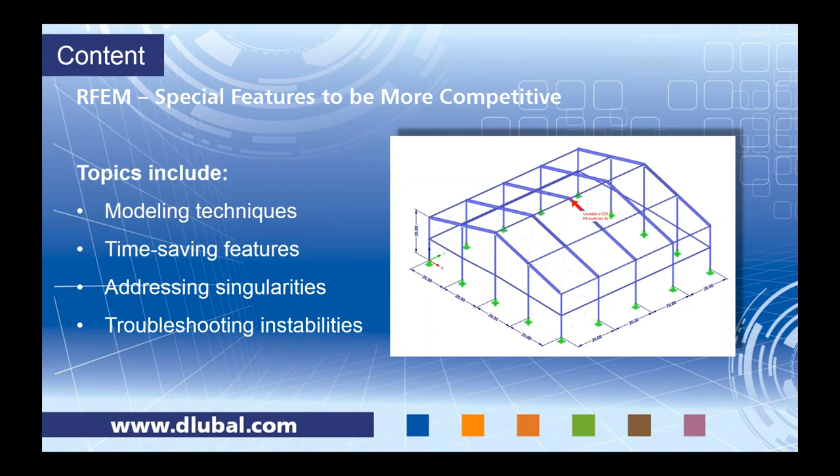I don't think there's a single engineer out there who has modeled that hasn't encountered an instability of some sort. So today I just want to show you some features in RFEM that I think help you troubleshoot these instabilities and to overcome them quickly.

And today's examples, it'll be these 5 examples here. You can see a couple are more focused on the finite element surface elements, and the other 3 are more focused on beam and foundation and structures of this sort. So with that, I don't want to spend too much time on the introduction. We can go ahead and get started with our modeling.

So for our first example today, I just have a simple frame here. If I scroll in, you can see our W shapes for our columns, W shapes for our beams, nothing too elaborate. It's restrained in the out of plane direction.

And I went ahead and applied some line loads here. Dead load, we have 3 kips per foot. Live load, 2 kips per foot. And then I went ahead and put a wind load, a lateral load of 1 kip per foot on the structure. You'll also see here I have some load combinations that were just created according to the ASCE 7 using these 3 load cases. And then I also have my result combination. Result combination is nothing more than an envelope solution to give you the max and mins for all the load combinations that I have specified from the ASCE 7.

So with this result combination, I want to go ahead and run an analysis. And it tells me that the results are not found, so it's going to go ahead and run through all of those load combinations. And if I take a look now, I have a results option down here at the bottom of my Project Navigator tab. So this is where I can actually control what I see graphically from my results. You can see here that right now I have my moments in the local Y direction displayed.

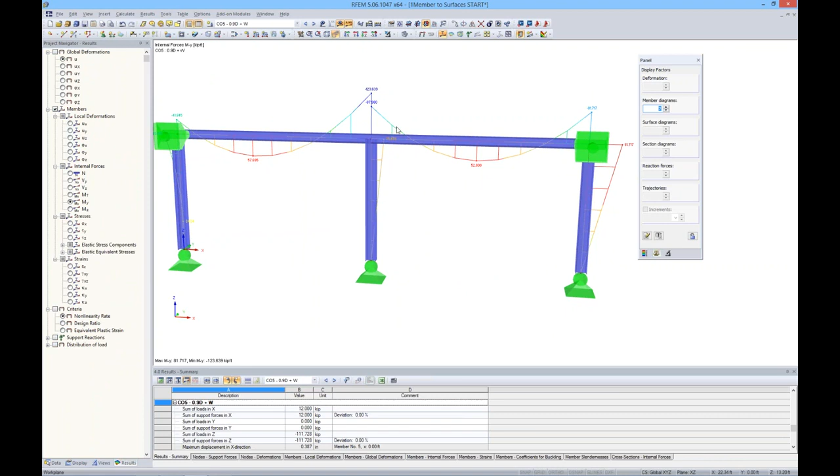We have a max and a min, and I can go ahead and scroll through all of my load combinations here, and it updates according to which load combination was shown. I can go ahead and increase my member diagrams here so you can see them a little more clearly, and we can take a look at our axial forces.

Maybe we want to take a look at shears, we have stresses here. The other thing I also utilize in this model is we have quite a few add-on modules, so we have one called RF Steel Members, which is essentially a stress analysis of our steel members. I'm using the results from our result combination to go ahead and get a stress ratio.

You can see here that if I take a look at my colored panel list, my ratio is actually 1.11 at this intersection. So for design purposes, this obviously is not okay—we can't have over 1.0, and in some cases maybe it's 0.8 or 0.9. You can see the rest of the beam is relatively okay, even at these other column locations at 0.75.

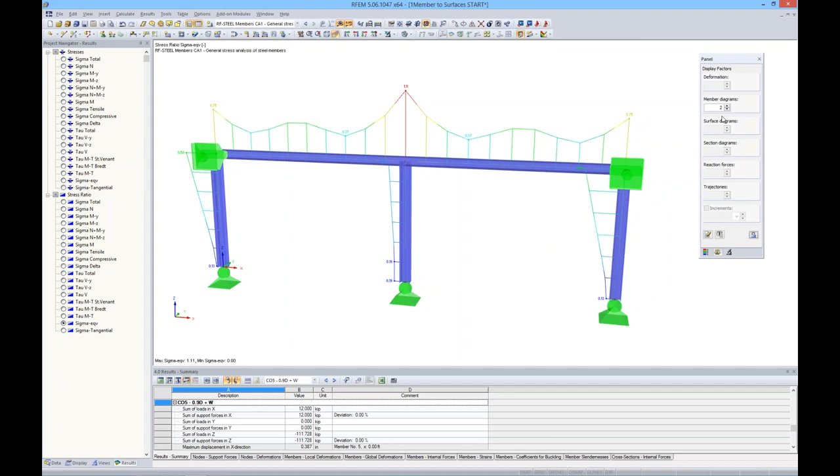If I go ahead and decrease my member diagram, we can really see clearly where the problem area is—it's right at this intersection. So we have a couple options here. We can certainly increase the size of our members, but again this can result in an over-conservative design because the only problem area is really this intersection here.

So what I'm going to propose is that we maybe take a more detailed look at our intersection with a finite element analysis. If I go ahead and go into our wireframe view and turn off my results, we can see that our members are simply 1D elements. When you're drawing a member in the program, it will only be this line, which is the centroid of the section, as a 1D element.

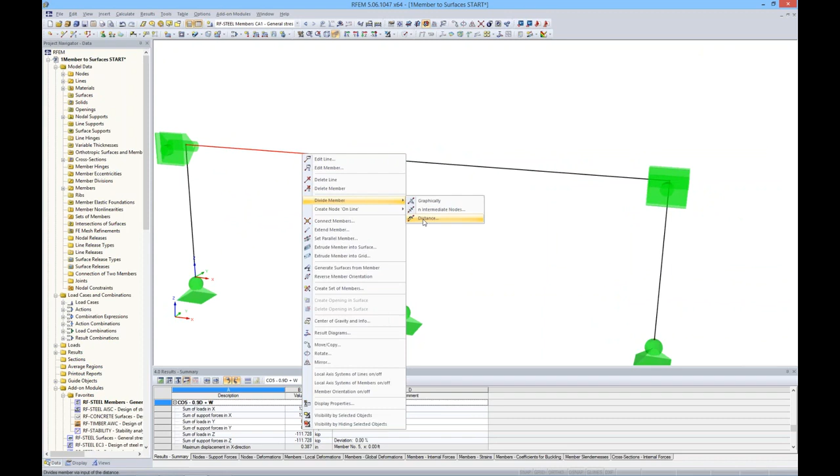I want to go ahead and divide this member here. All I need to do is right-click on the member and go to Divide Member, and I have a few options here, but I want to divide by the distance. You'll notice this arrow here going from left to right, so we know where the start and end of our beam is. So I want to divide the member 2 feet from the end, and I hit OK.

So now you can see that I have 2 separate members. And you might be thinking, okay, what about the loads? What happens with the loads when you divide a member like this? You can see that the loads were also divided, but the program's smart enough to keep that value on the divided member as well.

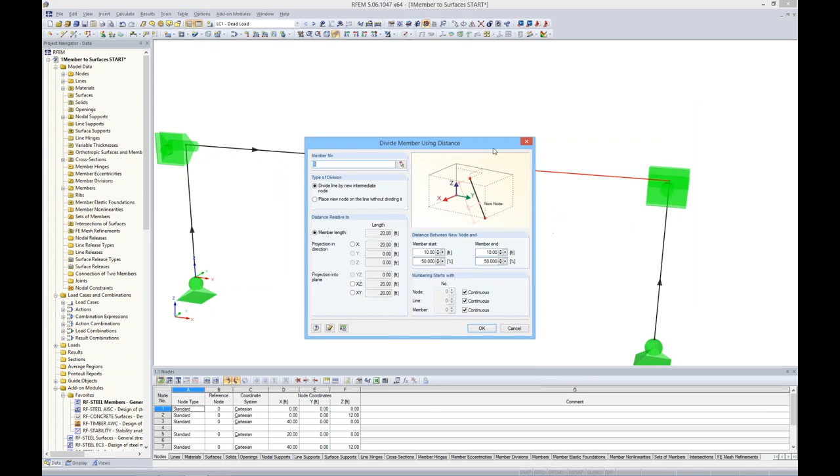So we want to go ahead and do the same thing with this one. I'll divide the member by end distance, and this time, because my arrow is going the other way, from start to end, I want to divide it from the member start by 2 feet. If I select this column and simply hit the Enter key, the last dialog box will come up—that's just a quick tip rather than right-clicking on the member to pull up the dialog box again.

And now we have these 3 separate members right here. So I'm going to go ahead and render it again, and I'm going to select these. The selection is just similar to AutoCAD: if I drag from left to right, it will only grab what's in that box; if I go from right to left, it will grab everything that box touches.

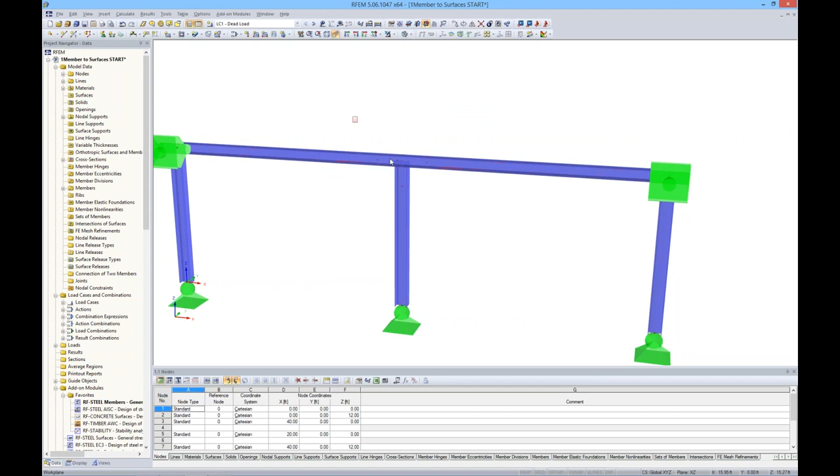So for this case, I'm just going to select here, and I'm going to choose visibility by selected objects. So now I can no longer select anything other than these 3 elements that I specified before. This is a pretty powerful feature that RFEM has that I haven't seen too often.

If I select my 1D members, right-click, and go to my member menu, I can generate surfaces from members. Now you can see—let me go ahead and put it in the wireframe view—that these 1D elements are now surfaces.

So they're 2D elements now. If I go ahead and click on the web for this surface, you'll notice the thickness is 0.38, steel A992. All of this is taken directly from the section you specified, the W shape.

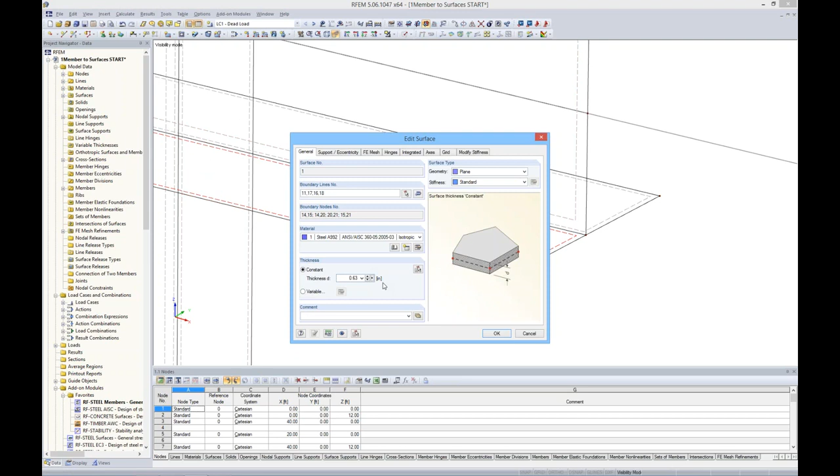If I go ahead and select a flange down here, the thickness is 0.63 inches. So again, everything was taken from that W shape.

You might notice here that we have some geometry issues. Obviously, this is not valid. So we want to move the flanges of the column to the bottom flange of the beam. I'm just going to hold down Control and select all of these nodes at once.

I'm going to use our Move Copy tool, and I don't want any copies here, I'm just going to be moving. Typically I would need to know this distance to move these flanges down to the bottom flange of the beam. Maybe after a little while I could decide, okay, half the depth, take into account the thickness of the flange.

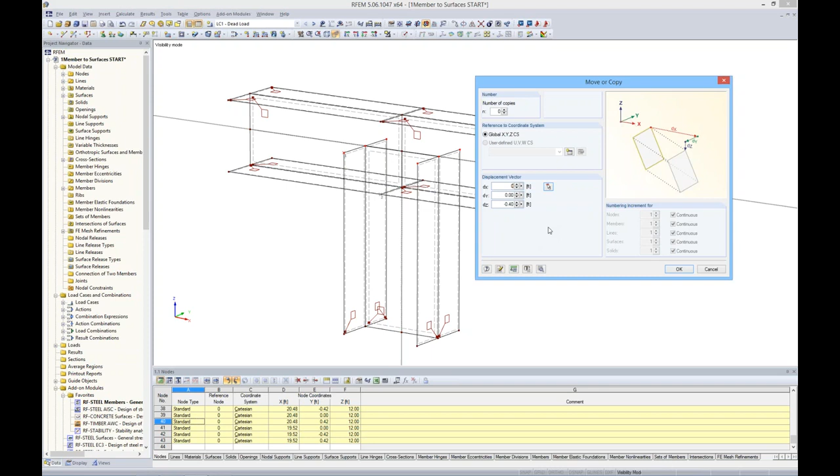But instead, RFEM has this tool where we can select 2 points to get a displacement vector. If I select from the top of the flange down to the bottom of this flange, you can see I now have a displacement vector in dx and dz. We will not be moving it in the dx direction, only in dz. So I hit OK, and you'll notice everything lines up quite nicely.

Now, the other thing to consider is that we have this single point here where this 1D element is framing into the surface. This can cause a singularity. All of these forces are being transferred to this one particular point rather than being distributed over this entire surface. So what I want to do is create a rigid plate at the end.

For our surfaces, if you go up to this button, you'll notice we have quite a few shapes you can choose from: donuts, semicircles, triangles, polygons, really anything you'd like. The program will create this surface element and automatically mesh everything, so there's no need to individually mesh the elements.

Some other programs require you to tie nodes and elements together, but the program will do this all automatically. So for this case, we're going to choose polygon, and for my stiffness I'm going to choose rigid. Everything's grayed out because our stiffness is super high.

So here we will just go ahead and draw our plate, and once we close the loop, we can see we have a new element here. We will do the same for this side, and lastly we want to do the same on the bottom of the column. I right-click to get out of that dialog box.

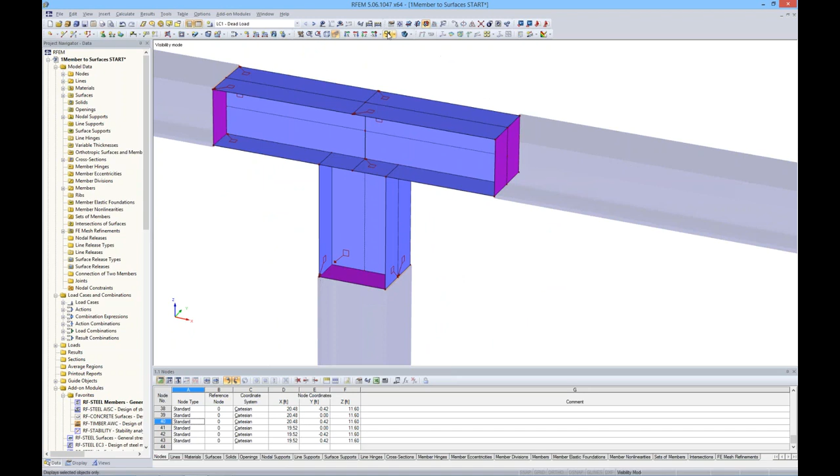You can see now that if I go ahead and render my views and turn off my visibility mode, everything lines up quite nicely.

Surfaces are only modeled at the center line of the thickness, so we have the option in our display menu, which is essentially everything you'll need to adjust your graphical view. If I scroll all the way down, I have the choice for rendering here - the model, the solid model, surfaces - and I can fill including the thickness. Then if I zoom in, you can see everything lines up with the 1D element to the surfaces.

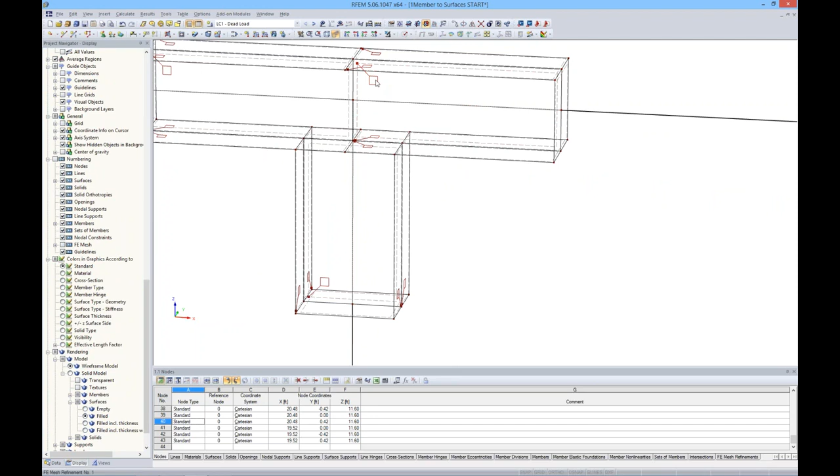I will go ahead and turn that off. Now the other thing I want to show you is the FE Mesh. You can notice that the program has automatically inserted these refinements. For the sake of this purpose, I'm going to go back to our data and go ahead and delete these.

Now if I go to Calculate, FE Mesh settings - and I think most people are familiar with this from FE analysis - you have to specify the length of your finite elements. Default is typically 1 foot. If I go ahead and generate that at 1 foot, we can see this is clearly too large for this situation. We only have one FE element for the entire width of this surface.

So if we go to Calculate, FE Mesh settings, and change this to 0.1, and regenerate the model, we can see that this is much better.

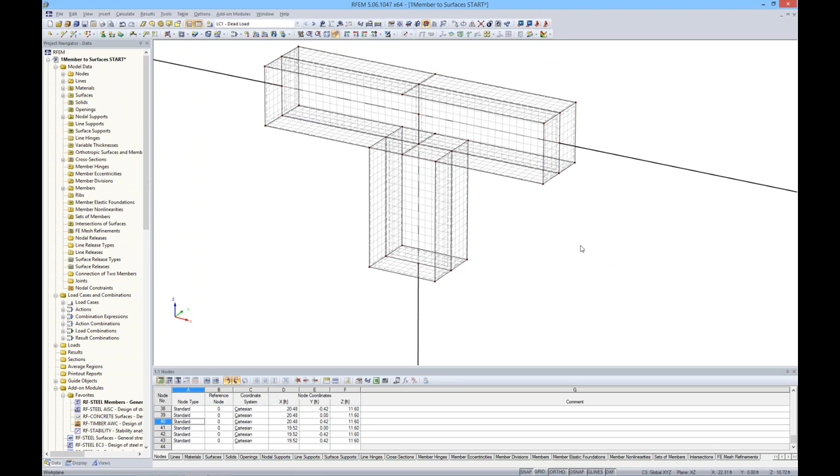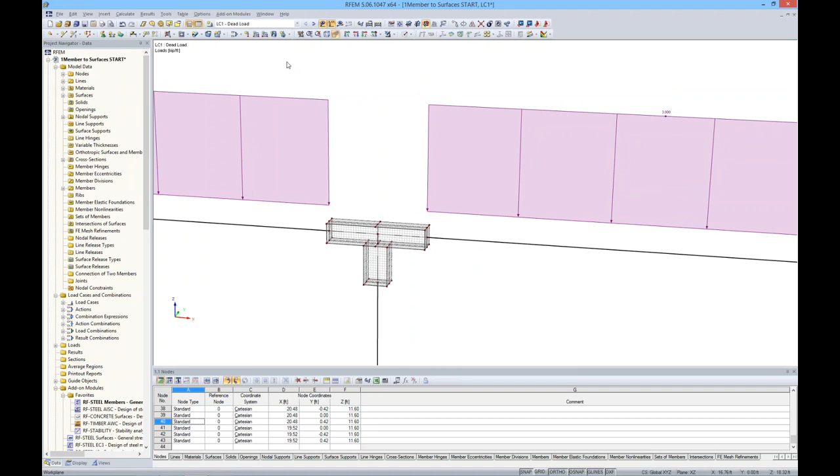The program ties all nodes and lines together, so you don't need to worry about that. Now, one last thing to consider is our loads. For our dead load, we kept these two member loads, but in this case we no longer have a member here, we have a surface. So we need to delete these member loads and apply a line load instead.

Line load is very similar to a member load, except it can be applied to surfaces. So here we want to apply -3 kips per foot. I zoom in and click on my lines, and now you can see the 3 kips per foot has been added.

I want to adjust my live load. If I hold down the delete key and click on each load, that will delete those loads. Again I draw a line element, and because I'm in the live load case up here, that's where this load will be generated. For this one, I want to specify -2 kips per foot.

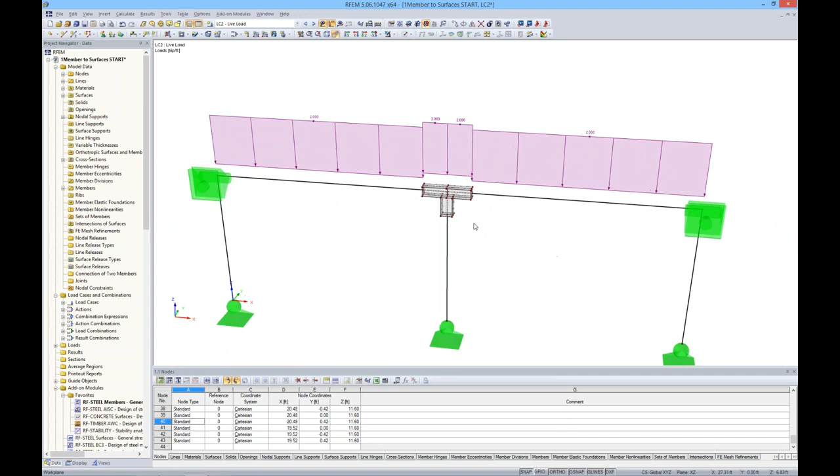I scroll in here, and now we have our loads. Okay, I believe we are ready to run our analysis.

Instead of the members, you'll notice that the member diagram stops short of those surface elements, which is fine. I'm going to turn that off and take a look at our surfaces. If I scroll in here, now I can view all the different internal forces for the member: shears, moments, everything of the sort.

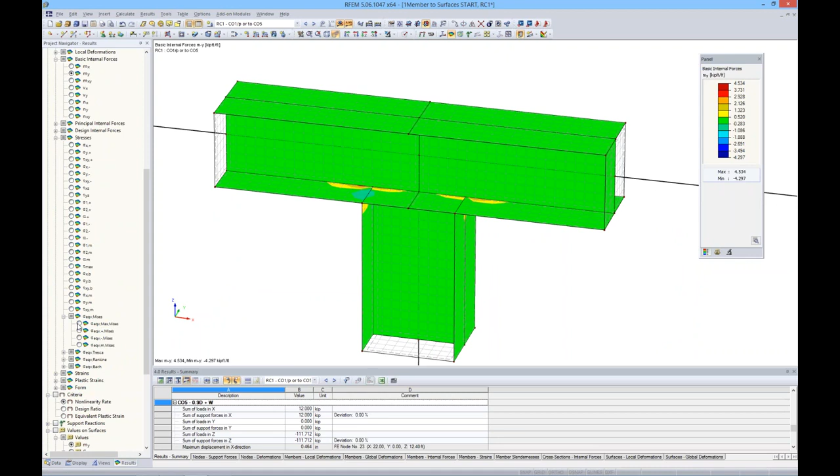What I'm really interested in is the stresses, so I go ahead and view the von Mises stresses. Everything looks okay until I zoom into these points. We can still see that it's extremely overstressed.

So we have an option here where maybe we want to add a plate to this bottom flange, maybe an inch plate.

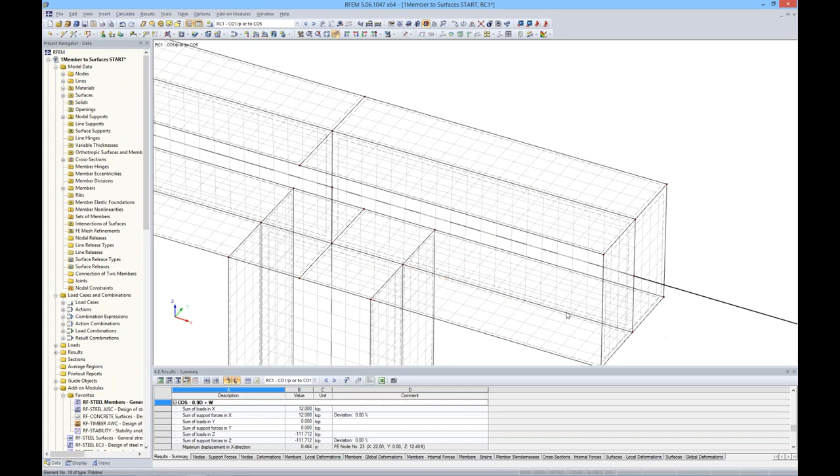If I turn off my results and hold down control, select this surface, then I can select all of these bottom flanges. Now I can right click... oh sorry, I lost it, let me go ahead and do that again.

Okay, now I can right click, edit surface, and increase my thickness now to 1 inch. In the rendered view we won't see that unless we change it to the thickness under our display options. You'll see that it's slightly thicker than our 1D element, which is exactly what we want. I'll go ahead and change it back here.

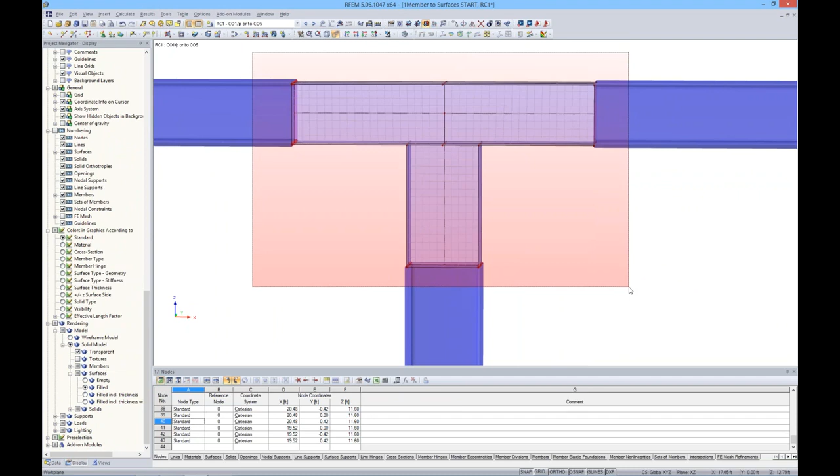Now the other option is to actually do a plastic analysis. With our add-on module, MatNL, which takes into account nonlinear materials, we can select all of these, right-click, edit our surface, and create a new material.

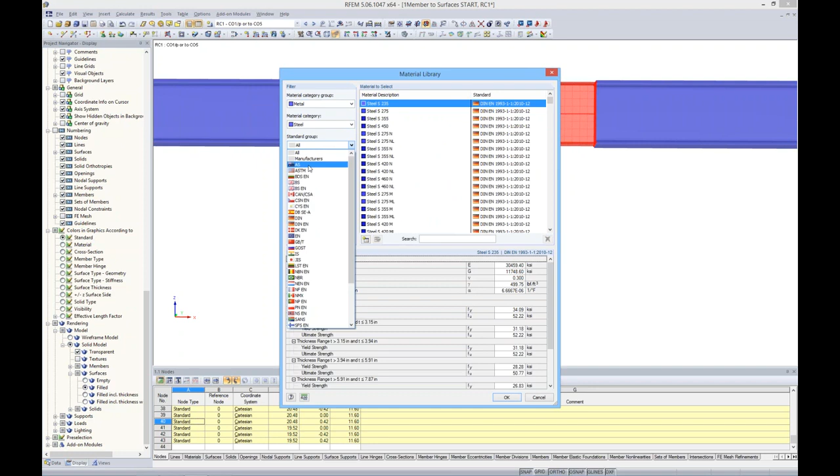I go into my materials dialog box, and you can see the library is full of quite a few materials. We can filter them according to metal, steel, ASTM, but more importantly we have this favorites group option, where you can save the ones you use most often. For me, I created one for USA, and I'll use steel A992.

Now, the material model default is isotropic linear elastic, but for this case I want to use isotropic plastic 2D, 3D. Up pops this other dialog box, showing our stress-strain diagram with our yield stress, 50 KSI, automatically filled out, and our strain hardening modulus. I click OK, everything looks fine, I hit OK, and OK once more.

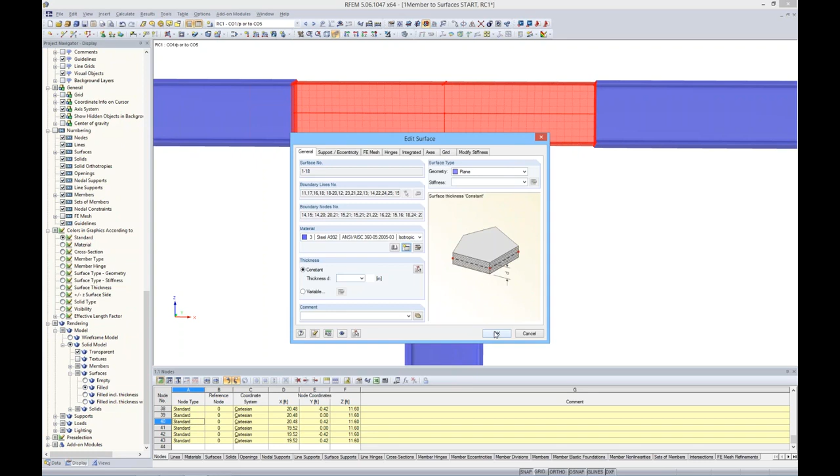If you're not sure whether the material is different from the rest, you'll notice I'm in my table down here with steel A992, which is isotropic linear elastic. As I highlight the field in the table, the members themselves will highlight as well. This blue one just means it's not currently being used. The steel A992 plastic 2D and 3D were actually applied here.

Okay, so I want to run my result combination again. This will take slightly longer than the last one because now it's a nonlinear material. Keep in mind the size of your mesh also matters for your finite element analysis—at some point, a smaller mesh won't change your results. So I'd suggest keeping a mesh that doesn't create a super long solve time but still gives you accurate results.

You'll notice that if you decrease the mesh size and solve again, your results won't change by much. We also have this graph here showing the maximum displacement as the program cycles through each iteration. As soon as this is done solving, which will be just a second longer... again, it's just because we have a nonlinear material.

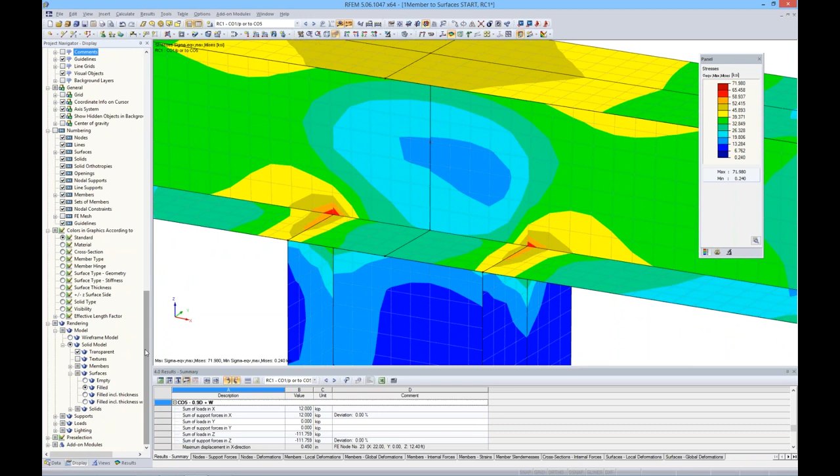Under my display tool, scrolling up to results, I want to choose constant on elements. This will average out the 4 values for each FE element, so you can take a look individually at each one. You'll notice that nothing exceeds 50 KSI, which is our yield stress—exactly what we'd expect.

An important thing to show you here is that we have an option under results called criteria. This criteria will show us the FE elements that are in their full plastic state at 1.0. These other two green ones are somewhere in between 0 and 1 as the ratio, and the other elements have not reached that state yet.

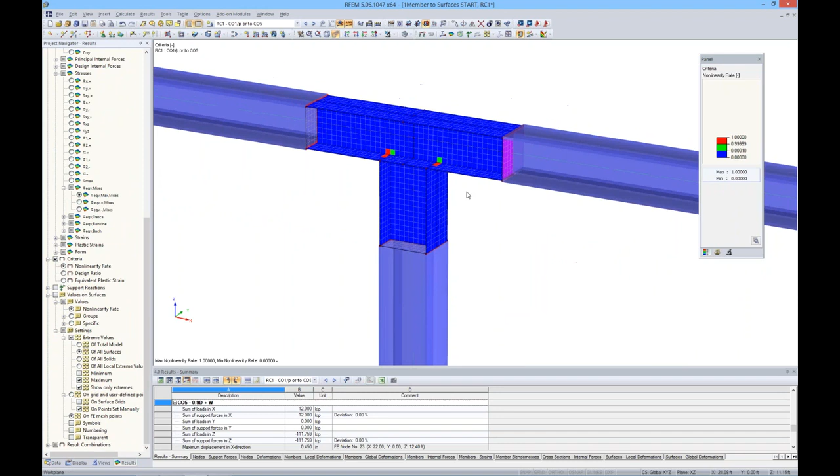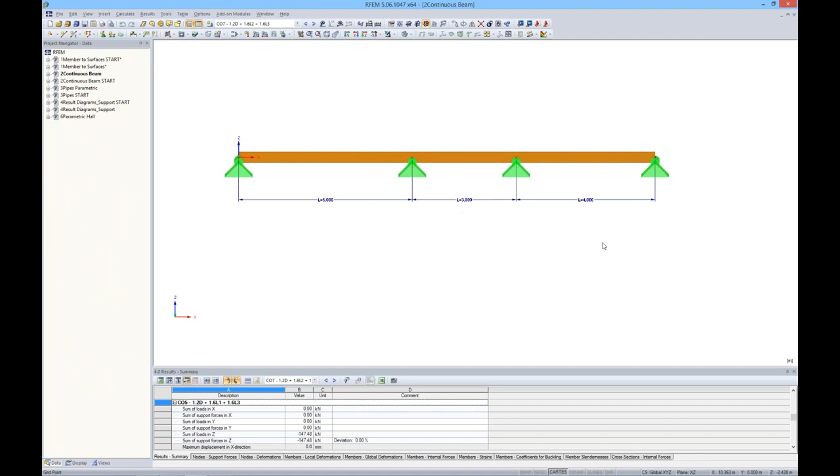So that concludes our first example. I want to move on to our next one, which is also very simple—it's just a continuous timber beam with 3 spans, nothing too special about it. But what's going on behind the scenes is actually quite powerful.

The purpose of this example is to show you the use of parameters, or parametric modeling. If I go to edit parameters and move this dialog box down, you can define a variable in the program and use it in an equation to change span lengths, loads, or angles. There are quite a few options—we can change areas, angles, surface thicknesses. I'll get into that in a minute.

If I type in 2 meters here, and for my B length—my second span—I'll type in 5, and for my C length, I'll type in 3, then hit apply, you'll notice everything updates. Supports are moved, and if I look at my dead load, everything was adjusted along with it. We also have separate live loads on each span, and those were all updated as well.

Now let's say I want to edit my live load to -2 kilonewtons per meter. I hit apply, and you'll notice the live load was updated. So you can understand the benefit of using parametric modeling for a company that creates a lot of similar structures, where geometry or loads change slightly—parametric modeling helps you deal with similar structures to improve your efficiency.

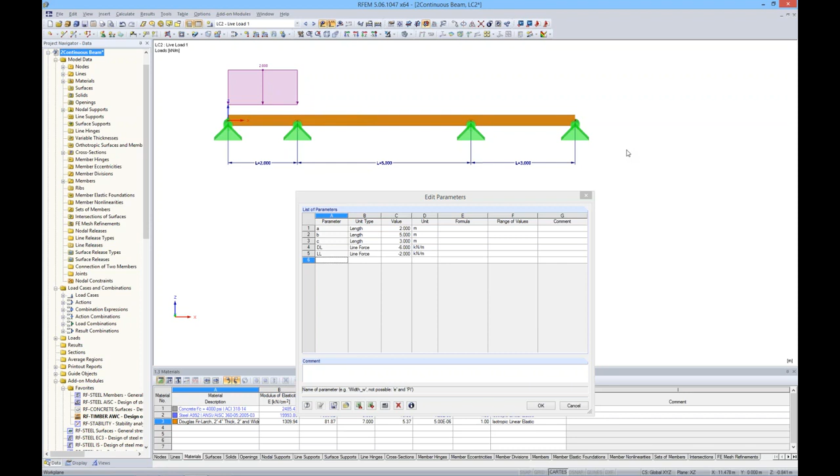Now the other thing I wanted to show you is I created quite a few load combinations from the ASCE7. If I take a look at my result combination, it's asking me do I want to go ahead and run the calculation. Yes, so this is just finding the max and mins of all those load combinations.

Now I want to take a look at my support reactions. You'll notice as I scroll through them my support reactions are changing according to the different loads that I have. Now I want to show you our print report option and including these parameters. I think RFEM has quite the powerful print report options compared to a lot of other software I've even used in my design career.

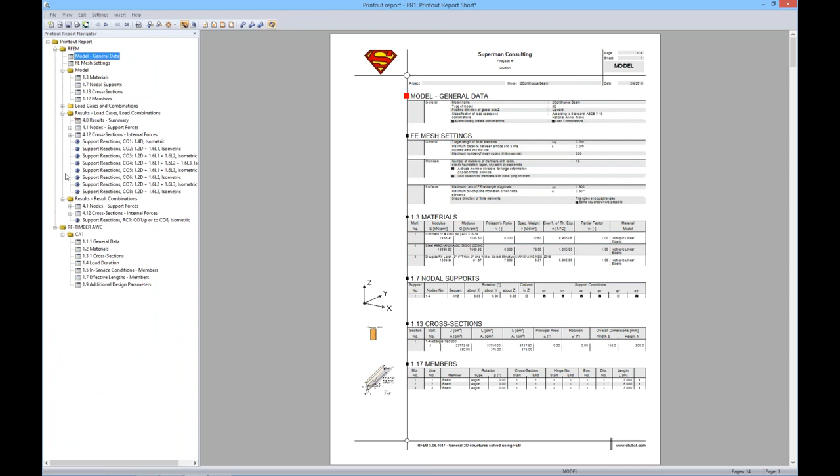If I go ahead and open up a printout report, one I created previously shown here, a separate dialog box will open. You'll notice on the left are our table of contents, or report navigator. I can click on these and our report will update according to where I am. The same goes here - I can keep scrolling down and the table of contents will also update.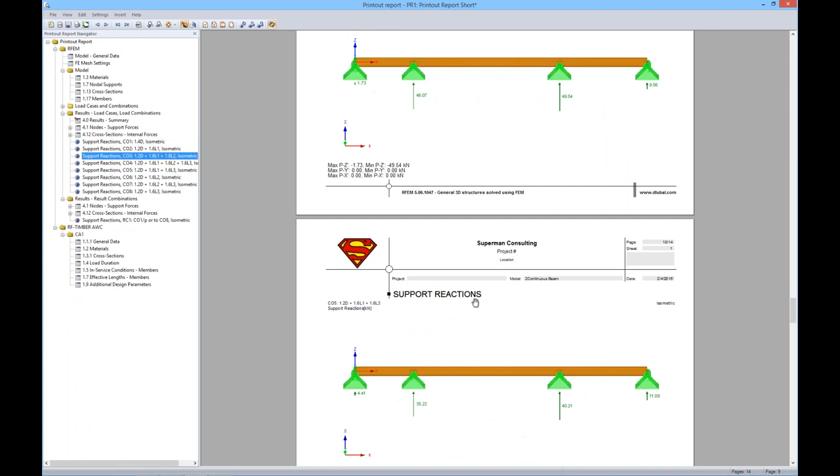I went ahead and put in some pictures of our support reactions, and you can see this is reflecting our spans that we currently have, which is 2, 5, and 3, I believe, for each load combination. If I zoom in here, I can see load combination 3, my support reactions, my max, my min. Everything has nice headings, very clear. But let's say my beam just changed all of a sudden.

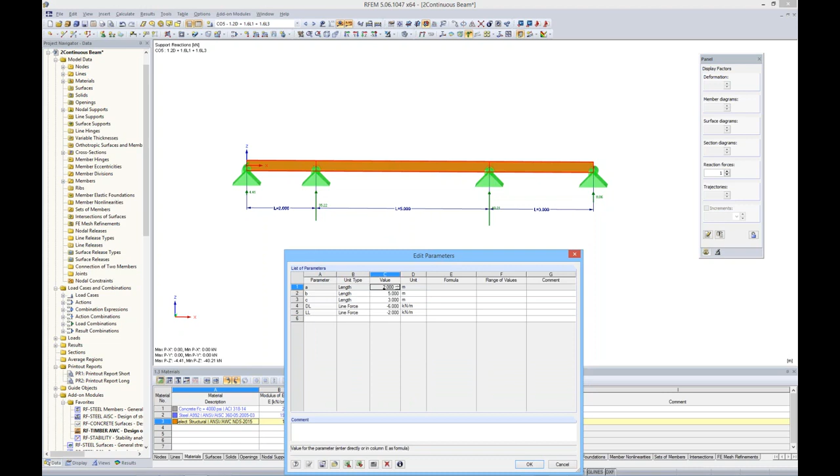So I'm going to exit out of this print report - no, I don't want to save it. I'm going to open up my parameters, which down here in my table under my first model data tab is a quick link to my parameters. Let's say I want to do 5 meters, 2 meters, and 3 meters. I hit OK, and you can see that everything was updated. Now I want to go ahead and run the results again.

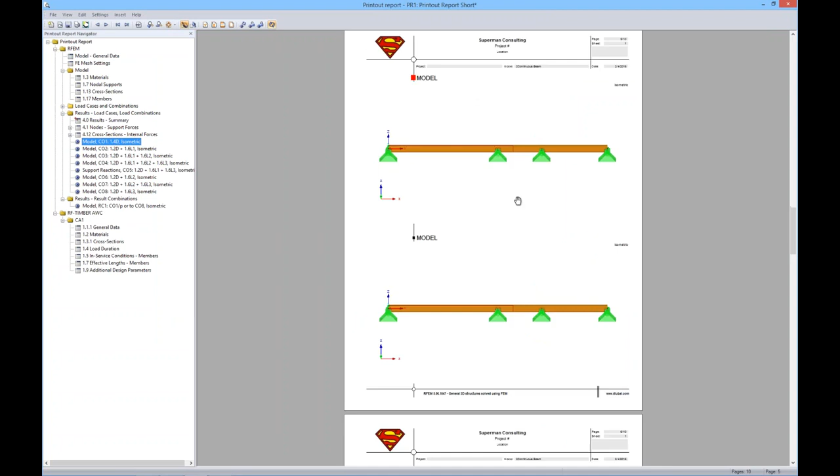And I go back to my print report, and now I want to jump down to these pictures, and you can see it looks like we are missing our support reactions. Well, regardless, I think we can see from our results here that we have the support reactions shown, and it looks like they're shown here. It should go ahead and update in our printout report. I'm not quite sure why, but regardless, the geometry is taken into account.

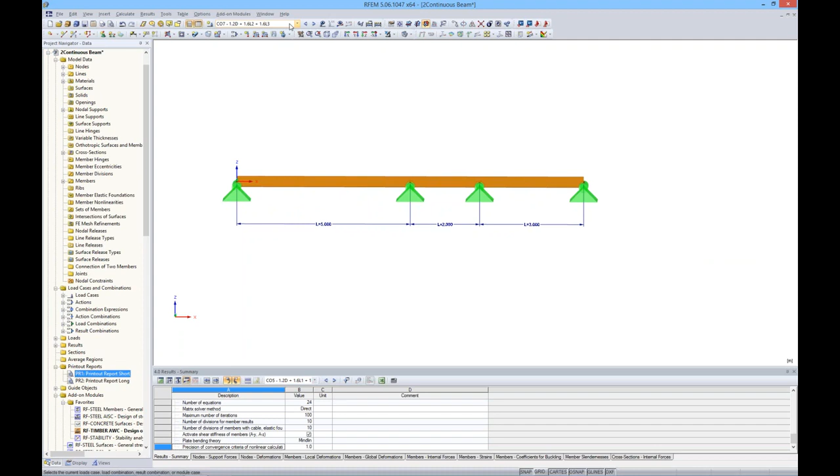Everything in the print report will be adjusted according to the changes you just made. I can showcase this further with the printout report by looking at our members. I'm going to turn off my support reactions and just view my moment about the y-axis. As I scroll through - oh, that was probably the issue, I didn't run a result combination. Again, this is just an envelope solution of all the load combinations, and I think that's why the print report didn't show up, because I didn't run all of them.

I can go ahead and scroll through each load combination for the moment about the local y-axis. I'll increase these. Let's say I wanted to print off this moment for each load combination. Typically you would have to take a picture or a graphic, insert it into your PDF print report, go back, change the load combination, and do the same thing. But we have an option in here called mass print.

If I go to my print option, graphic printout, I see the mass print here. I can hit these settings, and I have 3 tabs that pop up: model, loads, and results. I'm currently in results, and the program knows I'm looking at the moment about the y-axis. But for my load cases and combinations, instead of the current one I'm in, I'm going to select all. I hit OK, and now the program's cycling through each load combination for my moment about the y-axis, and it's going to insert those into this print report automatically.

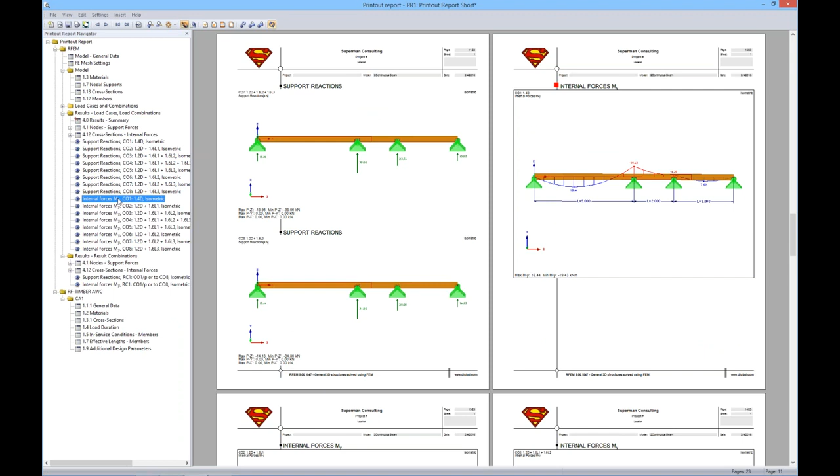So you can see now that my support reactions were updated - I just needed to run my result combination. If I scroll in here, I can see I have load combination 1 with my moments, showing my max and my mins. Scroll down, load combination 2, load combination 3 - everything is done automatically. I think you can imagine how much of a time saving that is when you can use this mass print option.

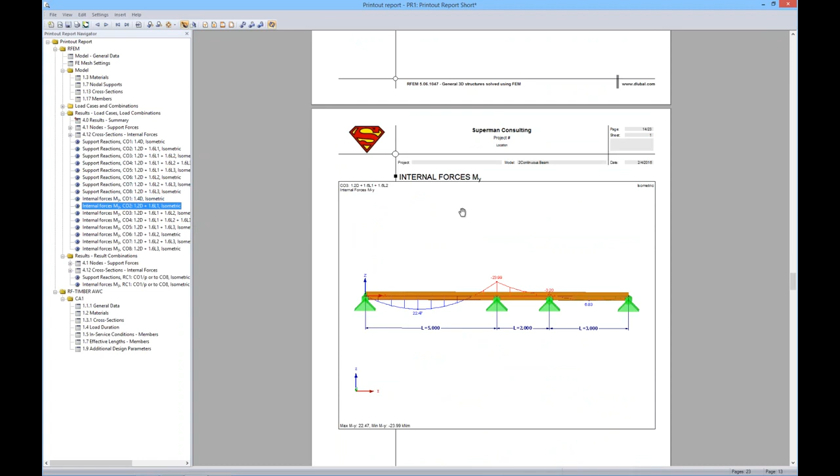Okay, so the question is, with parametric modeling, how do we actually incorporate these parameters into a model? So for the sake of time, I have already created this simple beam, and I've applied some loads on it according to dead load and live load.

I want to go ahead and edit my parameters. If I type in A for my first span length, the length automatically pops up, and we'll do 3 meters. B for my second span length, we'll do 5 meters, and C for my third. Now notice nothing in the model is changing right now - I'm just defining what parameters I want to have in the model. We'll make this one 4.

Now let's say we also want to consider dead load. Instead of length here, I want to go down - this is where there's quite a list to choose from for the amount of parameters you can define: precambers, moments, stresses, time, mass, percent. So we have quite a powerful option here when it comes to parameters.

For this case, I'm just going to go for a line force, and I will do -4 kilonewtons per meter, and maybe my live load, again a line force, and I want to do -2. Okay, so now that we have our parameters defined, we need to actually apply them to this model.

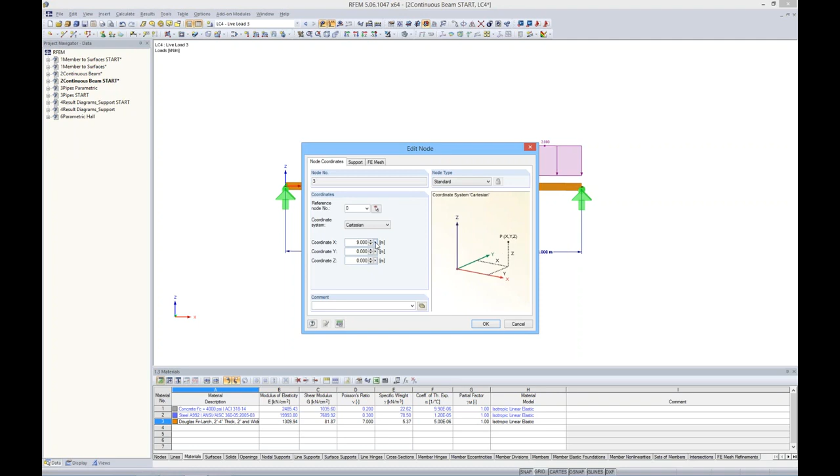I go ahead and do the same thing to this node. It's set at a static 9. I want to edit my formula, and I'll do A plus B. And now, again, it's dependent on those parameters.

And lastly, I want to do this one, and I will edit my formula: A plus B plus C. Okay, so everything is now dependent on my A plus B plus C.

Now we also need to do the same thing for our loads, and we can highlight all of these, right click, edit member load, and do the same way that we defined those node coordinates. Instead, here for the load parameters, for the actual value, I can use this arrow, edit formulas, and choose my dead load.

I hit OK, and now that dead load is dependent on that parameter. Now we just need to do the same for each live load. So instead of dead load, I'll choose live load here, hit OK, and do the same for each span - edit my formula, add my live load, hit OK, and lastly I have this one.

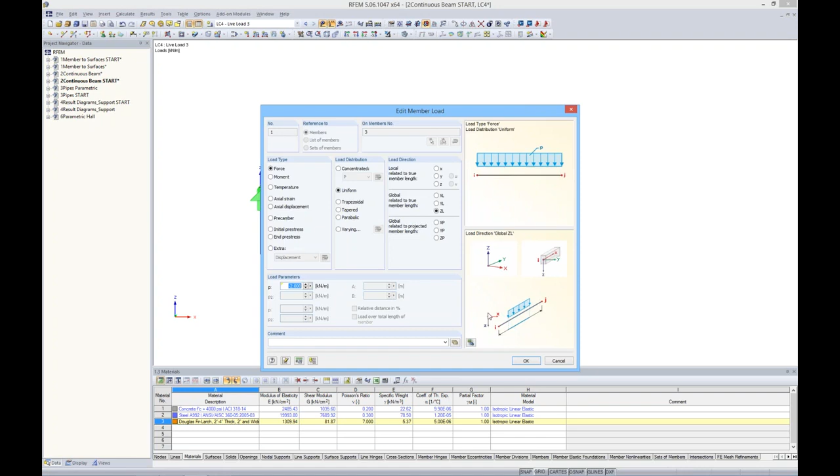Okay, so now if I go ahead and move this up and I open up my parameters, I change this to 2 meters, 3 meters, 6 meters.

We should see that everything is updated just fine. For our live load, we'll go ahead and choose -6 and apply that, and everything is updated. You can see that this is obviously quite valuable for a lot of the similar structures that you're working on, or maybe it's the same structure and there's a lot of changes going on within the design process.

So that sums up that simple model. We'll go ahead and move on to the third one. This one is a little bit more complicated, an FE analysis with our surface elements.

I also created this model to have parameters in it as well. I've defined my parameters, my angles, my loads within my pipes, which you can go ahead and define a pressure load within this pipe, and maybe the spacing between. If I go ahead and change this to 30 degrees and hit apply, you'll notice that this pipe automatically changed to 30 degrees here.

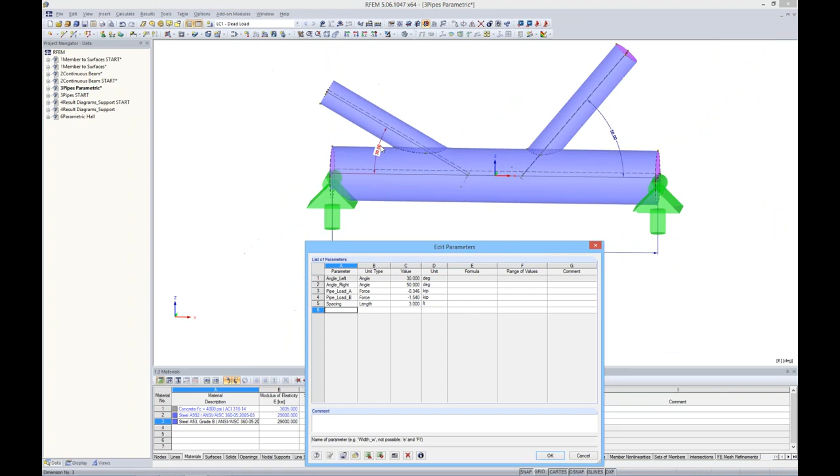One thing to take note is that this is an intersection of surfaces. You'll notice that when I changed this to 30 degrees, everything was updated. There's no need for me to change my FE elements. I don't need to go back and change the geometry. The program's smart enough to make all of those changes as I go ahead and adjust the model.

I can show you guys again, if you take note at this 50, I can go ahead and change my angle right to, let's say, 70 degrees. I'll go ahead and hit apply. Again, everything is updated automatically.

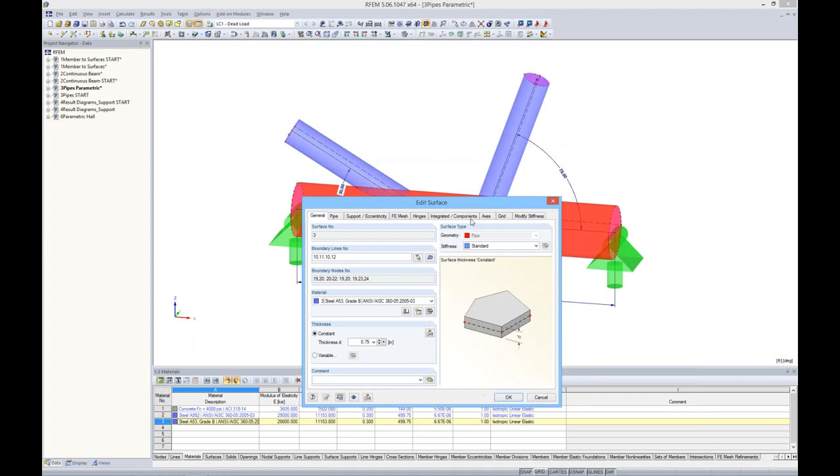I even have the ability to click here and right click to edit the component's parent surface, and we have a pipe option here. I can change my radius to 2 feet. Again, everything is automatically updated. Those surface intersections are moved up and everything looks quite nice.

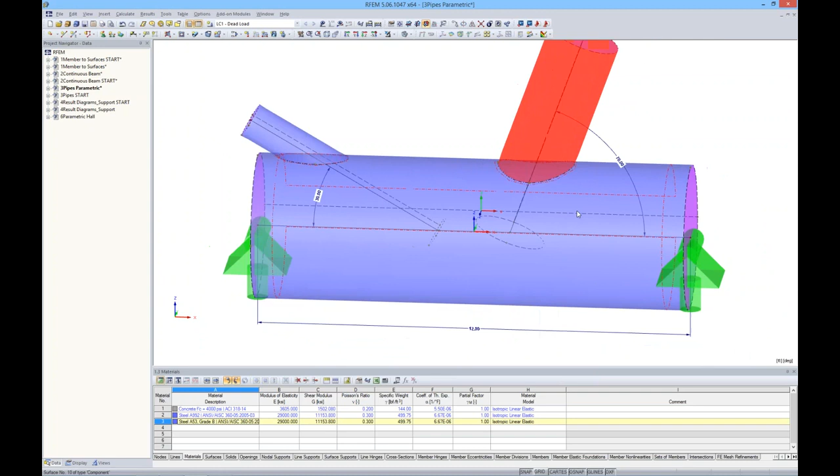We can do the same here. Maybe make this radius a foot, hit OK, and again, everything looks okay.

So I want to show you guys how to go ahead and create this model and create an intersection of surfaces. I'm going to go ahead and open up this beginning model, and all of these are just line elements. They're not members, they're just simply lines in the program. I can define maybe members out of them if I wanted to, but in our case I'm going to go ahead and apply a pipe surface.

So I'm using these quick tools up here, and you'll see there's an option for pipe. Maybe my material when I first open it up is something like concrete, or maybe it's even timber, just something not applicable.

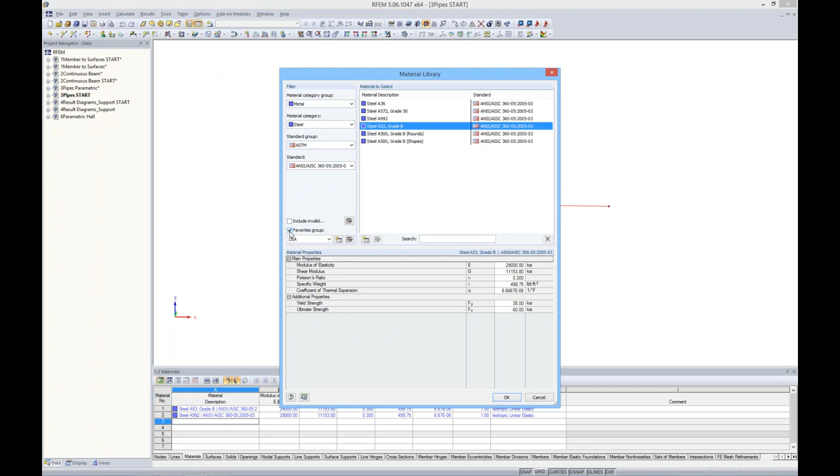So I can go in here to import a new material from my library. Again, for even metal, steel, ASTM, we have tons and tons of materials. I want to utilize my favorites group again, and I'll just go ahead and choose my steel A53 grade B. My thickness for my pipe, we'll just go ahead and set that to 0.6 inches.

Now we need to go ahead and click on the pipe tab up here and choose our radius, which we'll just do 1 foot. Now you'll see that the program automatically applied it to this line because I had it selected when I went into that dialog box. I want to go ahead and do the same for these two elements.

So I can go in here to my pipe surfaces again, and again you can hit the enter key and it will bring up that same dialog box, which is a little bit time saving. For my thickness here, I just want 0.2 inches, and my radius I'll go ahead and set it at 0.5 feet or 6 inches for these smaller strut pipes. Then all I need to do is just click on those lines and everything's created.

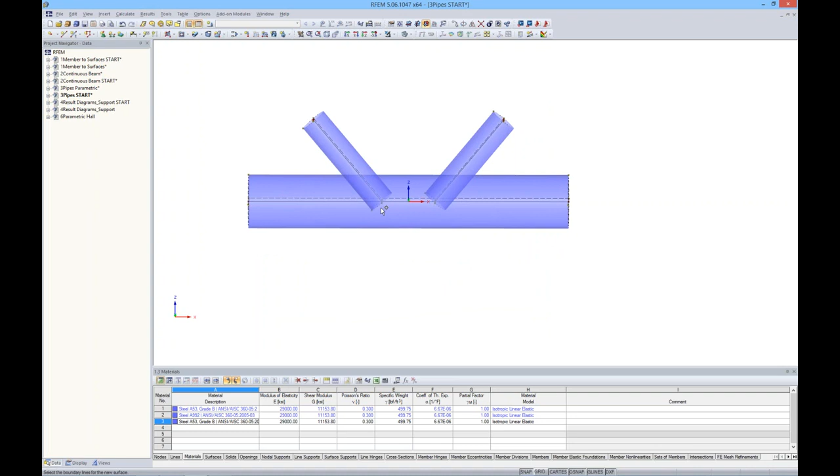Now you'll probably see that we have some issues with our geometry. Same thing as the first one, we have some intersections here that we need to take care of. So what I actually want to do is select everything, right click, and for my surface I want to go ahead and create an intersection. The program will automatically intersect all of these surfaces that I have selected. Now they're all just surface elements, but again we need to take care of this geometry.

So I'm back in my data navigator for this model, and I can actually go to my surfaces here. If I expand my surfaces and click on them, you can see as I scroll down the list that it's actually highlighting each element that I'm clicking on in the graphic view. So we get to this component right here, and we do not want to consider this in our analysis. Typically this would not be a realistic situation. So we can right click here, and we can actually deactivate the component.

So you'll notice here that it says inactive, and it's gone from our solution. I can go ahead and do the same thing for this one, deactivate, and I also have the ability to activate it again. But for right now, this is exactly what we want.

Now, just like the first model, we need to go ahead and create some rigid end plates here. Instead of polylines, I'm going to select a boundary line, and select rigid here. All I need to do now is simply select these circles. You can see how easy it is to apply surfaces in RFEM—just the click of a button. I can right click to exit out of that.

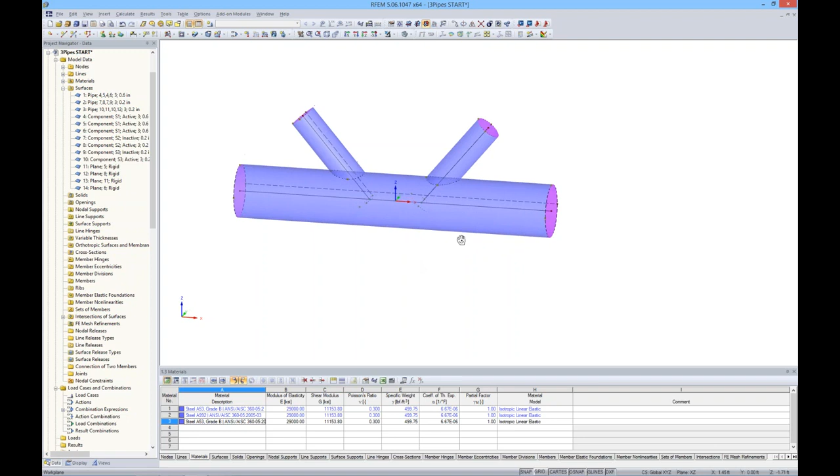Now the next thing I need to do is apply some support. I'm going to click on New Nodal Support, and since I don't know what this is, I'll create a new one. You'll notice here that we have a lot of nonlinearities available—maybe sliding, maybe friction, you can define your own diagram. So quite a few options here, or we just have the typical linear nodal supports.

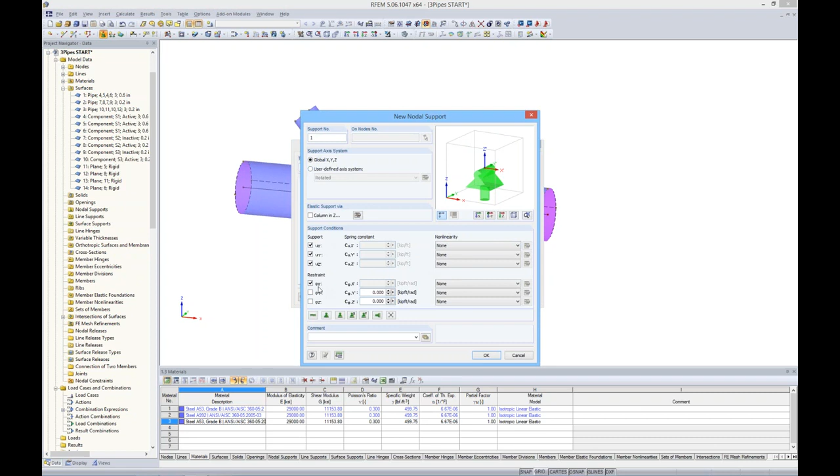For my case, I'm just going to restrain it in the X direction and in rotation about the X, and then in the X, Y, and Z direction. I'll hit OK, OK, and all I need to do is click on these nodes.

So lastly, I want to create a simple load case. Let's just do self-weight, so I'll call this load case description dead load, and activate self-weight. Now we just have this single load case, and we can view our results by running the combination. Actually, I forgot one thing I wanted to mention.

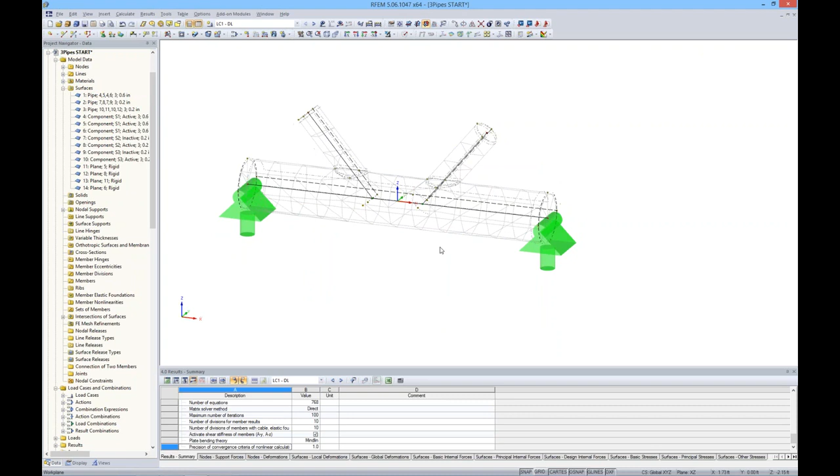Let me clear these results. You can see our FE mesh is not ideal—it's too big, and as you decrease this your results are going to change. When I go to calculate FE mesh settings, the default is 1.0, so for larger structures this may be completely adequate. But for a smaller model like this, let's change this to 0.25 and regenerate our model. And that looks quite a bit better.

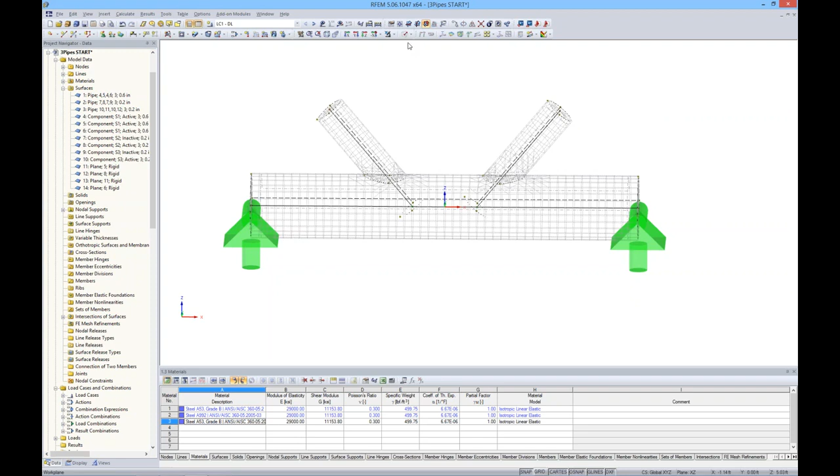You also have the ability to add an FE mesh refinement, let's say around this area, around a line. What that will do is decrease your mesh size only around this area without decreasing the entire model, which can significantly save on solve times. So let me run that analysis again now that we have a better mesh. We're only running dead load, so it should just take a second.

Now we can see that we are viewing our von Mises stresses for the pipe. Again, similar to the first example, maybe we have some higher stresses here that we want to address. We can certainly view our deflections, which is actually only 0.001 because it's only self-weight. I'm not going to do the parametric modeling because we went over that in the last example, but you can see how powerful surface elements are in RFEM and how easy it is to apply them.

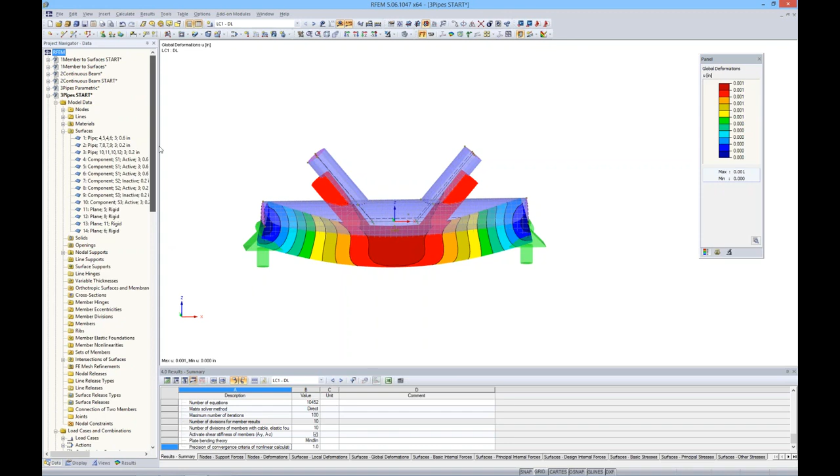Okay, so moving on to our next example, this is just a typical foundation—a concrete foundation. If I double click on it, I've defined it as 4,000 PSI concrete, 12 inches thick, maybe a foundation or an elevated slab, something of the sort.

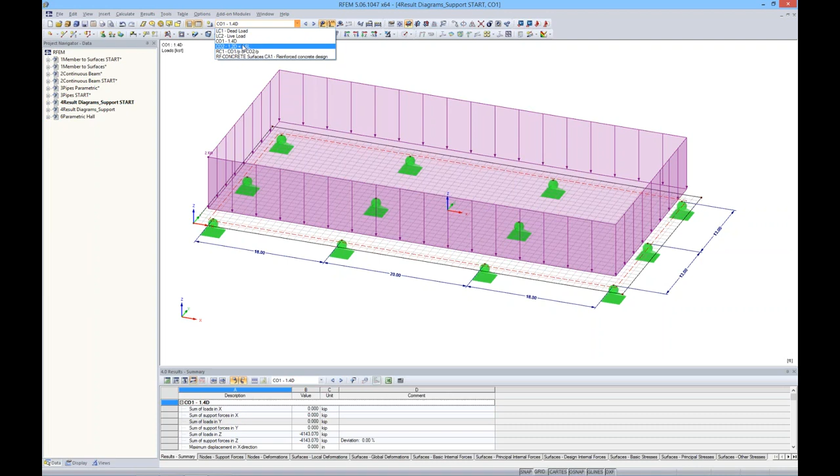I've also applied a few loads here—just your typical dead load in KSF of 1.5, maybe a live load of 0.75. I also have a couple load combinations here according to ASCE 7, and the result combination for the envelope solution.

Now I've also utilized our add-on module RF Concrete Surfaces. What this will do is tell you your reinforcement that's required according to whichever load combinations you choose. I ran RF Concrete Surfaces according to my result combination because I want the max internal forces to be used for the design of my reinforcement.

So I can go ahead and solve here—I already had them saved. If I look at my ISO bands, I can see here from my RF Concrete Surfaces, I'm looking at my required reinforcement.

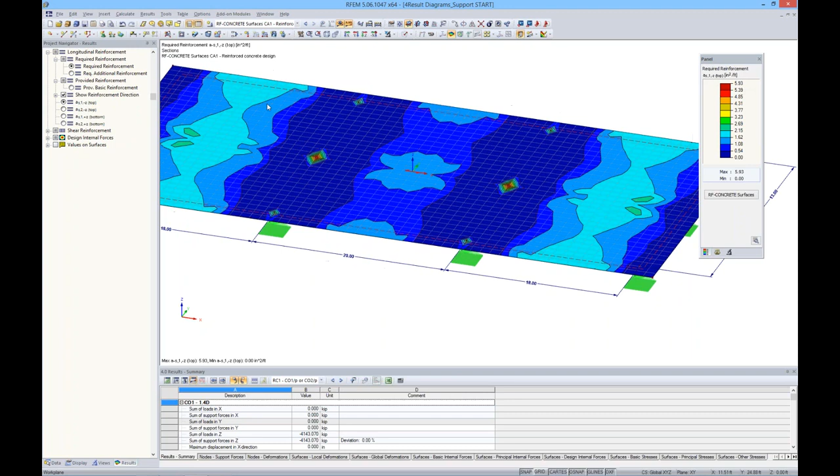I can zoom in. Everything looks okay except for these nodal supports, they look a bit high. I can go ahead and go back to my result combination.

I'm looking at my surfaces, let's look at our MX. You can see there's much higher moments at these locations of nodal supports. MY, the same thing. We can take a look at our stresses, very high stress concentrations at these locations, and this was a situation of a singularity essentially that we want to address.

If we don't address this, we'll have a much too conservative design for our reinforcement. So if I go ahead and turn on my grid, my grid settings are down here, I can just snap that on. I can right click and hit edit, and I actually have my grid set up right now to dynamically adjust according to the size of the model, so it'll just move with me as I am doing my modeling.

We have a feature up here called define a section or results diagram. If I go ahead and click on it, and define a section right down the center of this where those nodal supports are, up pops this results diagram. Essentially this is going to be a section cut right through where I defined it, and you can see my values are changing as I'm scrolling over the length.

Right now we have deflection shown in inches, down here are my stresses. Maybe I want to view the MY. You can see that everything is significantly high right here at this nodal support.

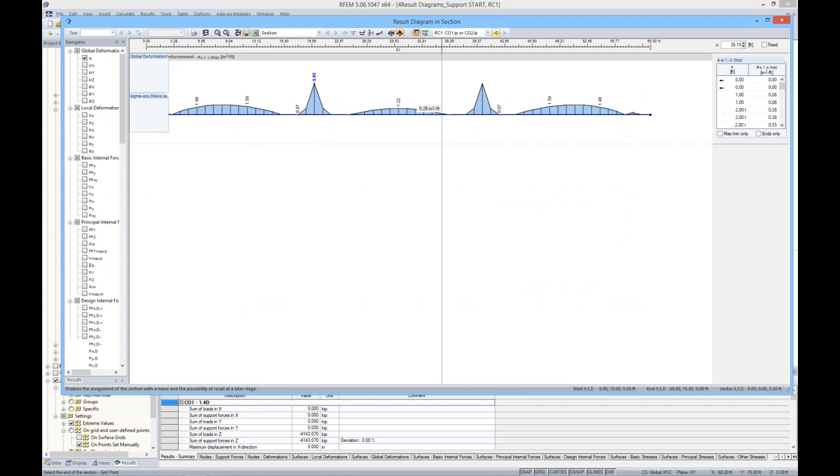I'm going to go ahead and save this section as midsection, so that once I exit out of here, I'll turn off these contours, and now I can view my results as this saved section. I can go ahead and scroll through load combinations to take a look at anything I want to view here.

So how do we deal with these singularities? We have a couple options in the program. The first is we can actually consider a column support here with the correct spring stiffness to distribute the load to all the surrounding FE elements here.

Rather than all of the load being placed on these single elements or single node points, we can actually distribute the load. I think this is a pretty cool feature of RFEM that I haven't seen too often, but we can go here to a new nodal support. I'm going to go ahead and create a new one.

Instead of using these definitions down here, I can create an elastic support via column in the Z direction, and up pops this edit column dialog. I have three options here: an elastic surface foundation, where our springs are tied to the FE elements; an elastic node support, tied to a single node; or a node support where it actually adjusts the stiffness of the FE elements as well.

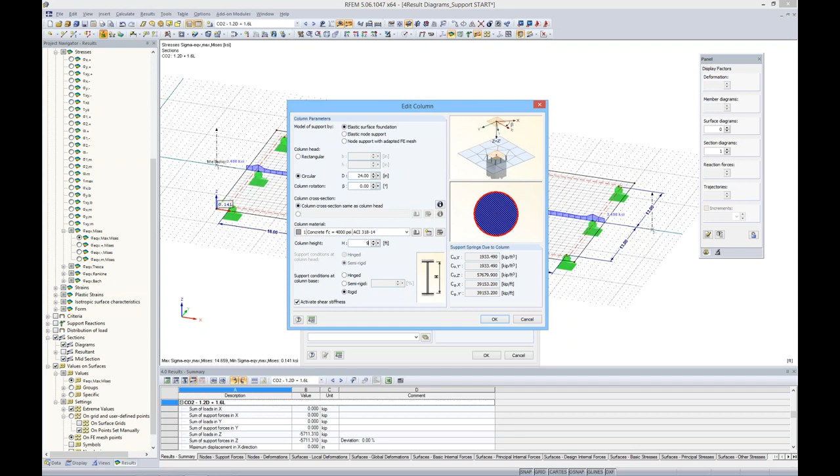As you change this, you'll notice the springs are actually changing as well. If I go ahead and hit OK, it's asking me if my FE mesh will be cleared, do I want to continue? I hit OK once again, and now I can apply this to here. You'll notice it looks slightly different, it has a radius here so that we're actually applying those spring stiffnesses to that support.

Now if I go ahead and run my load combinations again, this will actually run the concrete add-on module to take a look at my required reinforcement. We can see it visually here. Let me go ahead and turn off my grid.

If I go ahead and select midsection here, I right-click and go into my results diagram. Now we can see that it is undefined. We're only defining our reinforcement up to the surface of that column, up to the face of the column, which makes sense. This is typically what you would do.

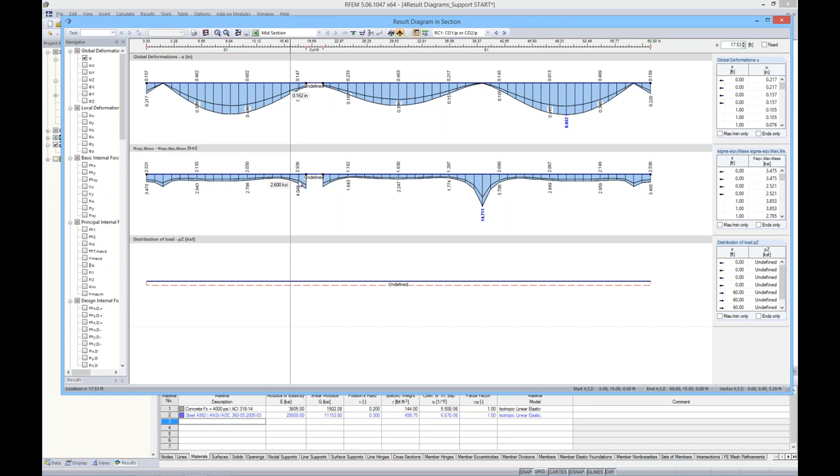Now we can see that the surrounding reinforcement required is much, much lower, but we're still looking at this singularity on the other node, which is exactly what I wanted to show you guys - how much our required reinforcement has decreased. So let's scroll back to our results combination. Again, deformations don't really matter, but our stresses are significantly lower at the face of the column as compared to the single support.

If we want to take a look at MY, we can scroll down here - undefined right here, still significantly high. So that is one way to deal with that singularity.

Now we have one other option. If I go to my data and expand on the model I am in, I can go ahead and look at my average regions here. If I right-click and do a new average region, this will let me define my surface first, and then define where I want to average out these regions.

I want to do this point support here. Maybe I want it to be circular, and I want the dimensions to be, let's say, 3 feet in this case. Now, what it's doing is averaging out in both the U and V directions, which we have a nice picture here to show us exactly what all of these mean. All of our internal forces will be averaged out within this 3-foot radius.

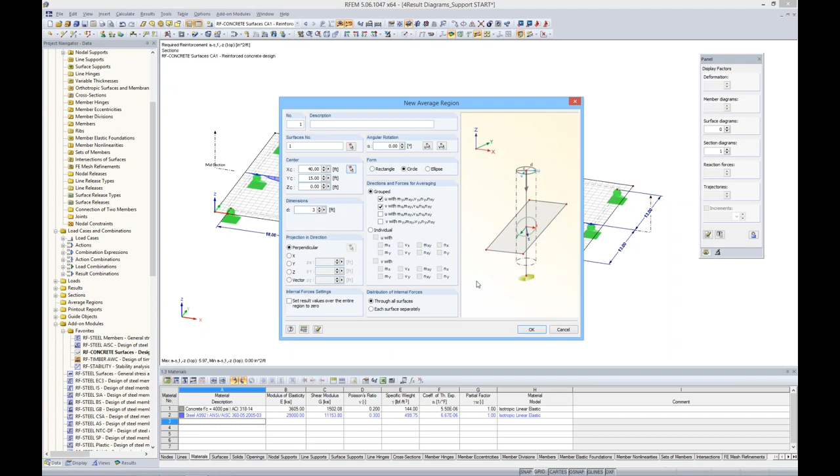I go ahead and hit OK, and solve once more. You can visually see here that our average region is shown. So now we can see that our reinforcement is down to 3.64 inches. Again, we can go to our result diagram and see that has been reduced. It's still higher than the other one because we aren't defining anything at the face of this column, but it is significantly lower in comparison to where we were.

We can go into our RC1 and take a look again at our von Mises stresses. Sorry, I have this other one shown here, but you can disregard that. Much lower than what we were looking at before. We can also go ahead and add in our MX - much lower than what it was before.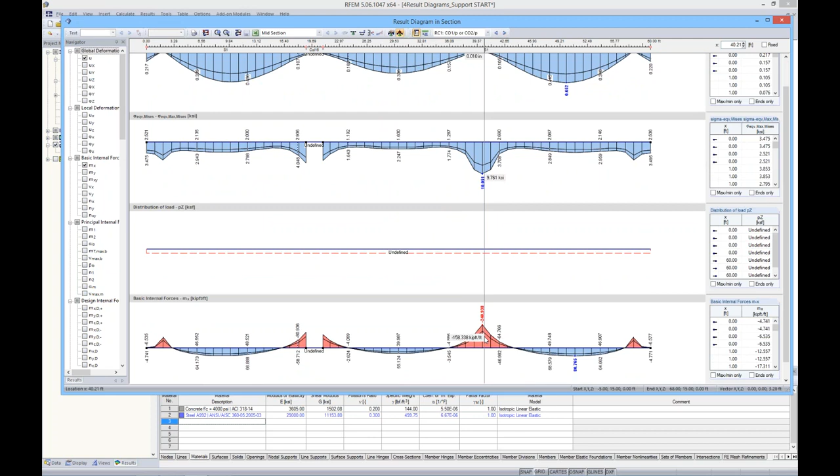The other quick thing I wanted to show you - if I turn back on my grid here, we have a powerful feature in RFEM called drag and drop. Let's say I wanted to copy this section over to here. All I need to do is highlight it, push down my control button, then drag it and drop it. And now I have another section here.

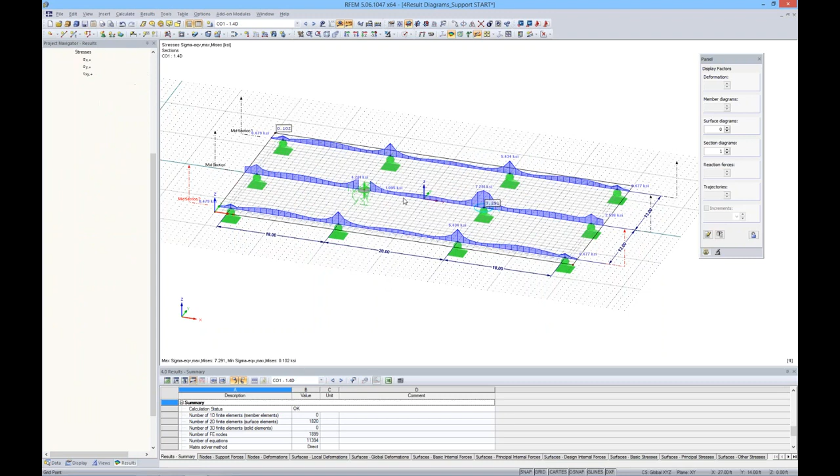Let's say I want to go ahead and do the same over here, and now I have 3 sections. You can go ahead and run one of these load combinations, and now you can see that I have these sections at all of these locations. What I wanted to show you was that essentially drag and drop can be used for anything.

Let's say I wanted to move this support here, or maybe the edge of this surface. I can simply drag out the corner of that surface element - it's asking me if I want to clear my FE mesh. So you can understand that's a pretty powerful feature instead of using the move option. You can also click on something, hold down the control key, drag and drop it, and it's just a copy. You'll notice that my grid went ahead and expanded with it.

I can do multiple elements. I hold down my control key and I can move everything over to here. So all the dimensions and everything are moving as well, but you can understand how much of a time saver that can be rather than using the copy move tool every time.

So lastly, I want to move on to our last example, and we will go ahead and open up this Parametric Hall.

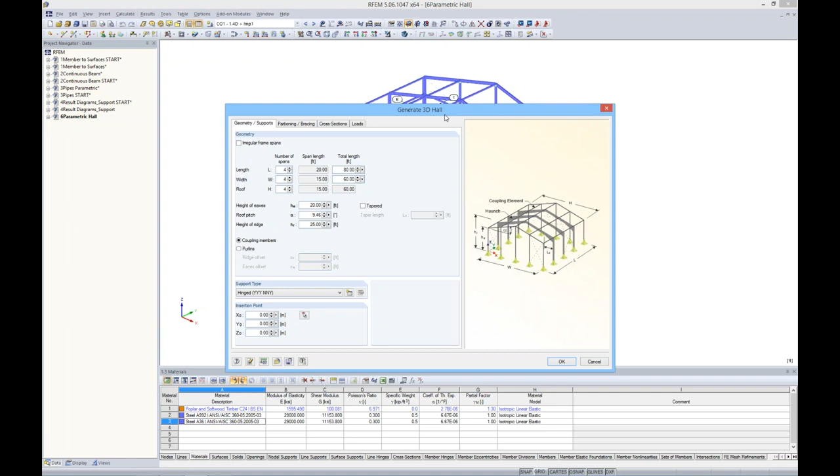It's a simple hall, and to let you know, we have this under Tools to generate model members. You can create quite a few different structures here. The continuous beam I used for one of our examples earlier. I didn't showcase it, but it's possible to do continuous beams, and more complex 3D frames and 3D halls can be created. If I click here to create a 3D hall, you'll notice I can define all my geometries, laid out very clearly in the picture.

Any bracing I may have, I can define my cross sections, and I hit OK, and my 3D hall would be created. This one is also based on parameters. Let's say I wanted this to be 15, and maybe another 15. And I go ahead and hit apply. The FE mesh will be cleared.

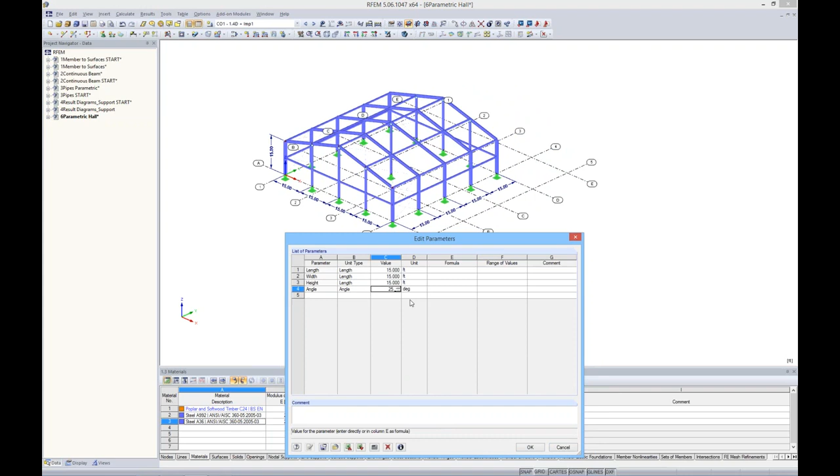Everything adjusts quite nicely. Let's say I want the angle of my roof to be a little higher, say 25 degrees, and I hit apply. Now the roof angle is changed. So again, just another use of those parameters. I'm going to go ahead and undo this.

So with this parametric hall, I went ahead and added in some simple loads. Again, we have our dead load, and now we have some snow loads on here, which I generated using our snow load generator.

If you go to Tools, Generate Loads, Snow Loads, Dual Pitch Roof, ASCE 7, you can see all I need to do is define the roof geometry and the factors from ASCE 7. The program will create three load cases: balanced, unbalanced, and unbalanced. It will automatically put them in as load cases into the program, which is what I did here. I have LC2 snow load 1, here's snow load 2, here's snow load 3.

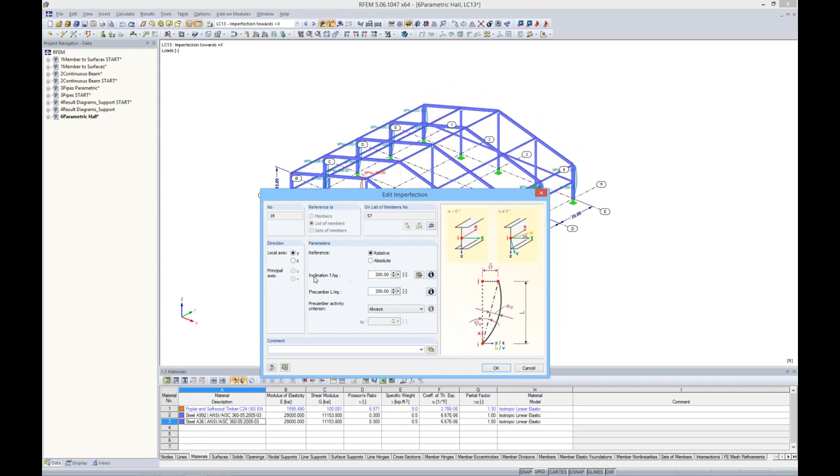And then I actually put in some imperfections here. Imperfections can be used for out of plumbness, or maybe we have a pre-camber, and I just wanted to showcase this to let you know it's possible to take all of these into account. They're dependent maybe on the normal forces in the program, and everything is done automatically. You just need to define your inclination and your pre-camber.

I have my load combinations here according to ASCE 7, and it includes all of these imperfections as well. So let's take a look at this first load combination, which is just 1.4 dead plus my imperfection. I go ahead and run it, and it begins to run, then all of a sudden I get this instability - an error message. As I mentioned, we've all seen these.

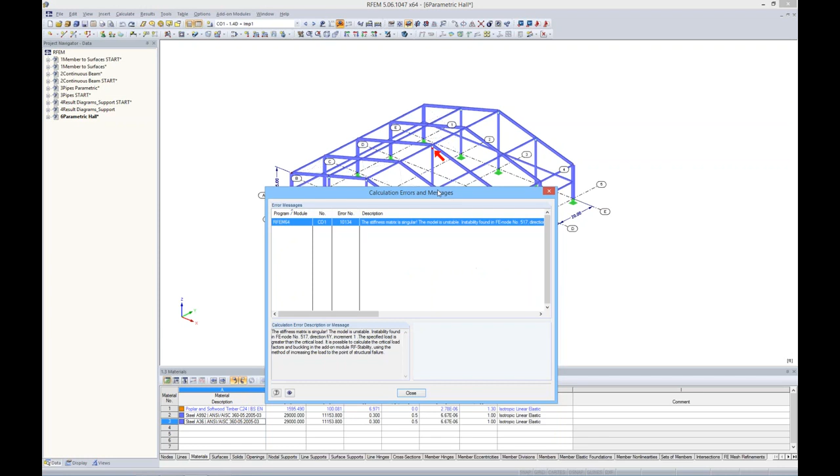However, down here in this explanation, it tells me the specified load is greater than the critical load. And what's really unique about RFEM is that there's actually a big red arrow telling you where this instability is taking place, which can be extremely helpful for large models. So it's telling me my specified load is greater than the critical load. I say okay, now I need to go ahead and address this.

So with load combinations, everything is run according to a nonlinear analysis, taking into account P-delta effects. But for load cases, they are run as a linear analysis. Only load combinations will apply those P-delta effects as nonlinear and adjust that stiffness matrix.

So for load case 1, dead load, I want to go ahead and run it just to make sure maybe my geometry is okay, that I don't have any nodes not connected. And I go ahead and run it, and everything runs fine. You can see here that I have my results diagrams pop up for my moments about the local y-axis.

So okay, it has something to do with those secondary effects. What I want to utilize here, which I mentioned to you before, is we have all of our add-on modules down here under our Data page - quite a few options to choose from. I added a few here to my favorites list, and what I want to utilize today is RF-Stability. So if I go ahead and open up RF-Stability, this will actually show you the eigenvalues graphically of the behavior of your structure.

Even if you can't solve it like I just showed you with that instability, we can go ahead and show the behavior of the structure and also the critical load factors that you can multiply your applied load by before you see that buckling behavior.

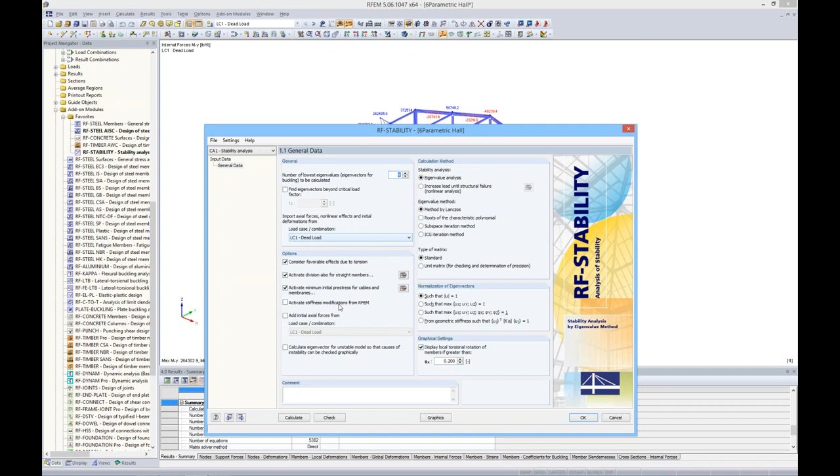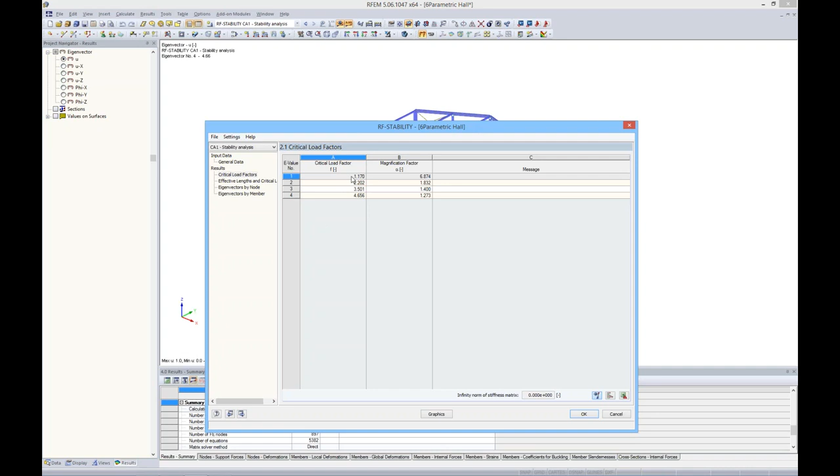If I go to my graphics view and take a look at my first eigenvalue and play this animation, we can see that this column is buckling out of plane. Let's take a look at the second one, and the whole structure is racking. For the third one, it looks like that column again, buckling in the other direction. And lastly, for our fourth eigenvector, it's still the problem column.

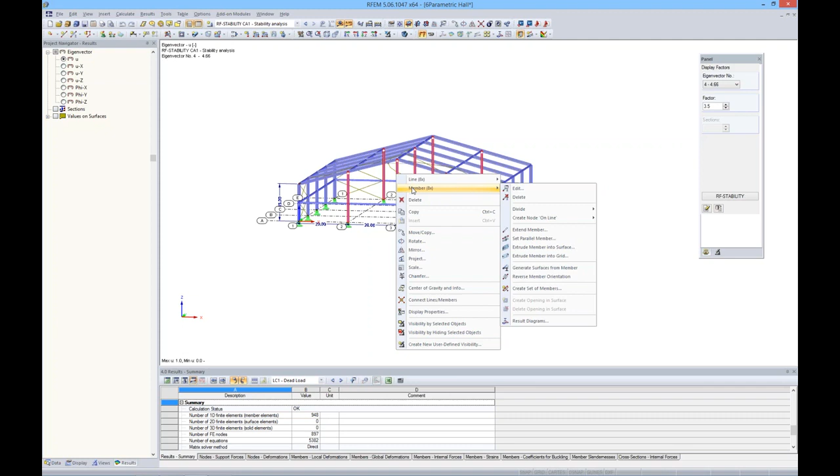So what we want to do is address these columns. Let me turn off this movie, and I'll select all of my columns in here, holding down my shift key to make sure I've selected all of them. I right click and go to edit my member. Essentially, if you right click with something selected, you'll find most of your options there.

I see that these columns are a W8 by 58, which is extremely small, so maybe we want to consider increasing the section size. I can just go ahead and modify here, and I'll again modify my shape.

This brings up all of our cross sections. I have my favorites group activated, so I'm only looking at the AISC shapes. Let's say we want to go ahead and select a 10 by 68. A992 is still fine, but we can always modify that here as well.

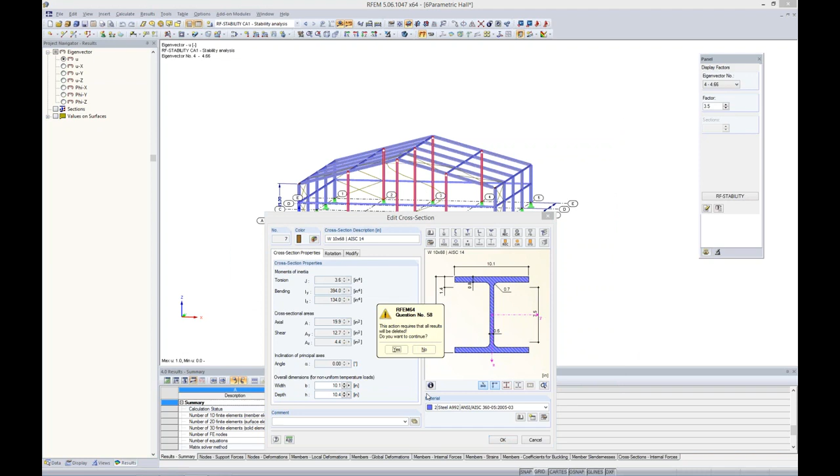I hit OK. Do I want to clear my results? Yes, I do, and I hit OK once again. So now I'm going to go ahead and run load case 1 with this new section size, and you can see now that we are getting results.

So again, RFEM can be really useful in pointing out where exactly that instability is occurring. Not only that, it can be used for a stability analysis with RF Stability to show you your eigenvalues and critical load factors to address the buckling behavior of any members you may have in your model.